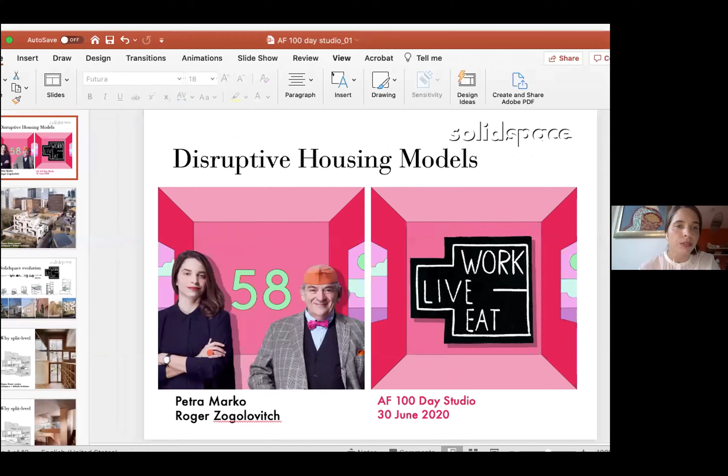Without further ado, I'm going to kick off our presentation, entitled Disruptive Housing Models. It's going to be a mix of our thinking about our own housing typology that we've been developing, but also a critique of the housing issues that we're facing as a city and the UK.

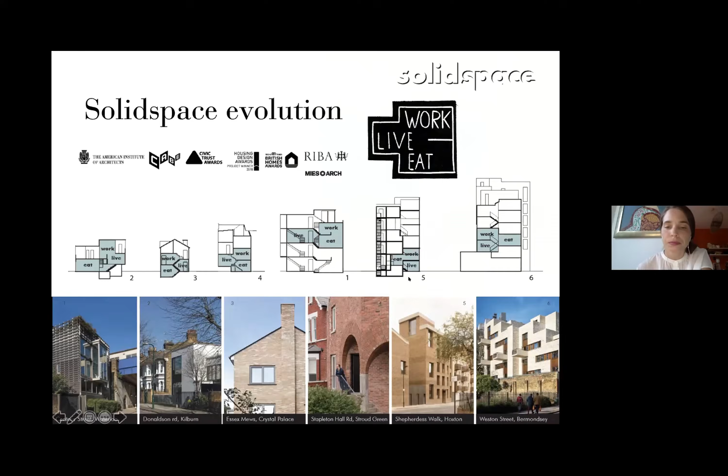So why are we so obsessed with this idea of the split level? There's lots of research that shows that daylight and outlook and our view of the sky enhances our well-being. And we have seen, particularly during the lockdown, that mental health is an issue for people whose housing is not adequate and doesn't provide those really important elements.

At the same time, by having this series of half levels, you're constantly prodded to move around, so it contributes to your day-to-day fitness. And at the same time, there's this fluidity between the spaces and a flexibility in the occupation.

Interestingly, the workspace has always been part of our Eat, Live, Work section for the last 15 years. It's never been as important as over the last 3 months, for so many of us working from home, to have this space where we can think and concentrate. On the right hand side you can see that gallery space used as a workspace, but it could easily be used as a play space for children, or as a large dining space. So it's really flexible to adapt.

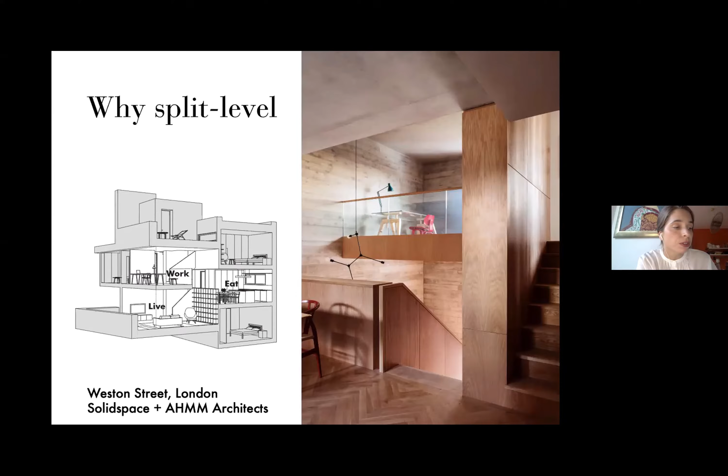Deborah Saunt described this quite lovely in her article about Shepherdess Walk, one of our projects: there is a kinetic sense of space between these semi-public rooms. The flats promote an extraordinary sensation of interconnectivity that is fraught with potential, allowing glimpses down to a living space or up to a galleried workspace. So this entire idea is about connection between people, and we can see how we suffer if we are removed from that connection, and our circle becomes smaller and smaller.

The idea of being connected to other human beings is the most natural thing that we have as a species, and it's not a new idea at all. In Parker Morris's book Homes for Today and Tomorrow, we found these lovely sketches by Gordon Cullen, which show exactly the same ideas about degrees of separation in these dotted boxes, but at the same time the fluidity of the space and the interconnection between them and the different activities you undertake.

So we've been having lots of thoughts, not just about construction and housing, but also about brand and why we need a housing brand, and trust between developers and the public. Roger has written plenty about this in his book, Shouldn't We All Be Developers?, which is really a kind of provocation and a think piece to talk about unlocking small sites and a radical change in which we can deliver more housing to more people, and good quality housing as such.

So at Solidspace we also have our manifesto, Making a Difference, which is challenging the status quo, thinking about what is the trust between the customer and the house builder or developer, and why this trust has been broken. If we look at the typical housing stock in London and other British cities, it is the Georgian and Victorian house which are the most loved and most trusted housing brands, and it hasn't been matched by any sort of new builds so far.

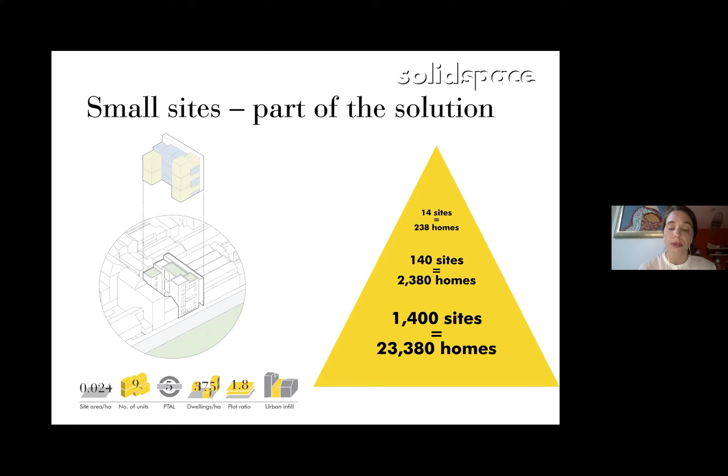But it is still to be seen how local authorities can proactively engage and release these sites. So we've also been working with other consultants on small sites for local authorities, to give advice on design codes.

And we've not been alone in this field. There's some wonderful examples also by local authority-led housing, such as the elderly housing by Peter Barber Architects in Barking and Dagenham, or community-led housing in Bermondsey by Bell Phillips Architects and Igloo.

So small sites come in all shapes and sizes, and here's one which we discovered in 2015 in North London, in a more leafy area of North London at the end of a Victorian terrace.

And you can see the transformation we've achieved with Stephen Taylor Architects, which has been really picking up on the local vernacular, very sensitive to the site. The site is locked between a road junction and a railway viaduct, so really challenging site.

We've developed 2 homes on this site, and the split level typology has resulted in this case in a specific way of entering the buildings, which has created this public threshold. So there's 2 entrances to each house, and one is half level up.

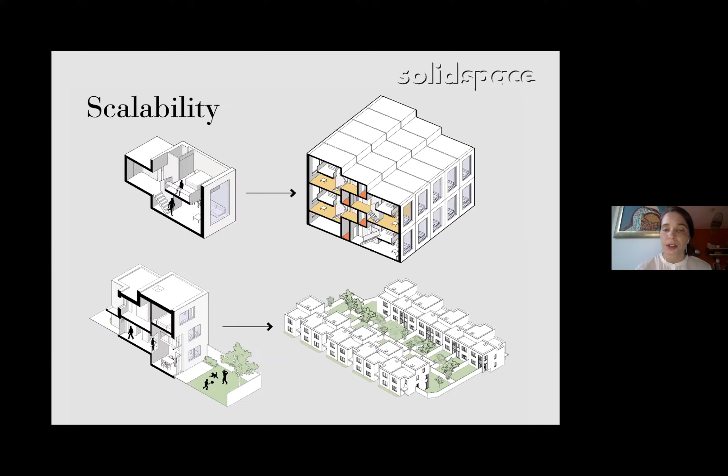So we're kind of taking forward the Weston Street model, which has been a refining of the 15-year Solidspace evolution, and applying it in a repeatable fashion.

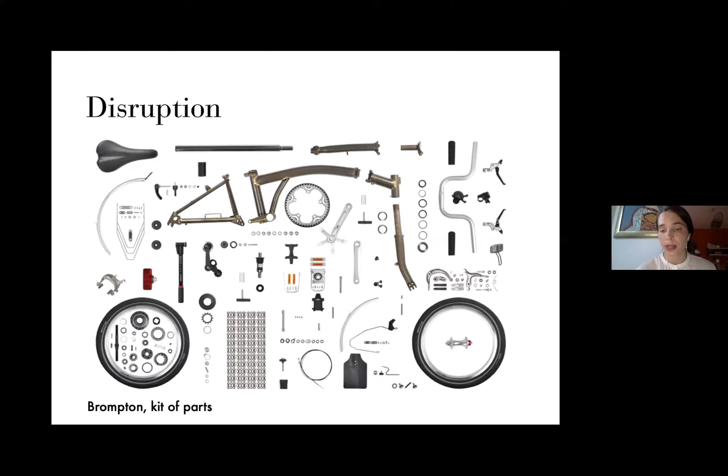Similarly, in the way that in other industries, successful, good quality products have been developed and took advantage of digital technologies. If you look at the example of Brompton, it is only the frame which the bicycle manufacturer has actually designed and manufactured. All the other elements, as a kit of parts, are from various suppliers.

So this is what we're really focusing on, because with our split level typology, it is the frame which is the core of our units, and we've been working and refining that frame and how it is made in order to get to construction costs that are not prohibitive for us to be able to really deliver Solidspace on many, many other sites.

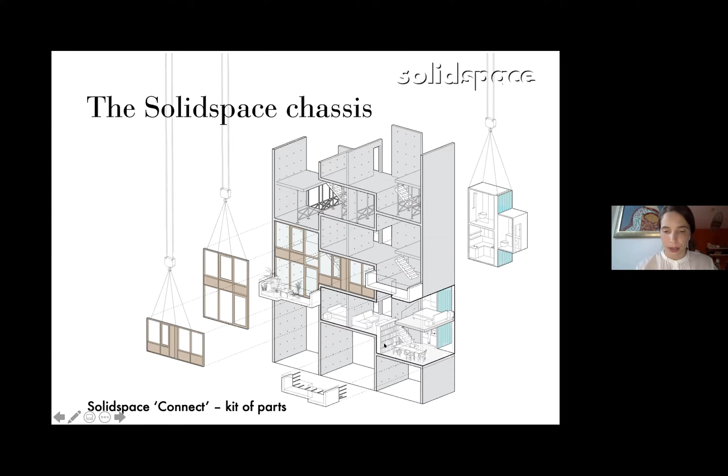So Roger will now take you forward in more detail about the construction and manufacturing process. And while he's getting ready with his slides, I'm going to read you a quick inspiration, and first go off my screen.

Thank you, Rosie. Just going to read a quick inspiration for any architects in the audience who've had different thoughts during lockdown, thinking about practicing differently, from Roger's book, Shouldn't We All Be Developers? Architects should consider forging new paths towards making their own buildings. The gap site is intriguing and within reach. These sites benefit from architecture to unlock their value. Architecture is about generating value, not cutting cost. So the value argument has really been at the core of what we are doing. We're not trying to cut costs, we're trying to take forward the value that we create with the spatial model.

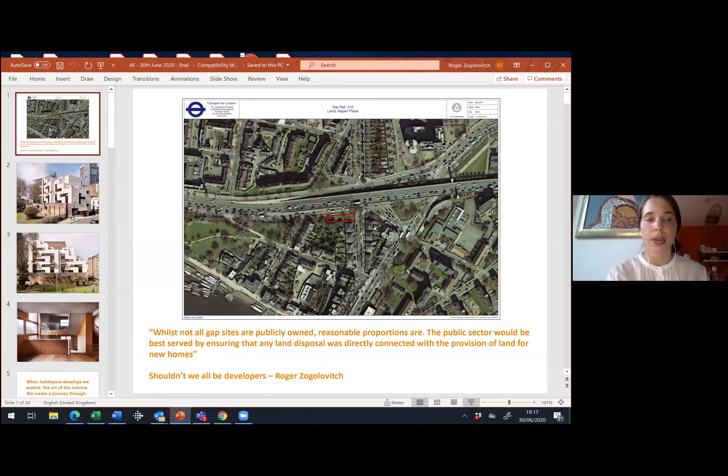And over to Roger now. Well, thank you, Petra, and good evening, everybody. It's a great pleasure to be here, although I find this kind of talking in a virtual thing a bit difficult, because I love to sense the audience when I talk, but I'm enjoying it, whatever it is. It's very lovely to communicate.

And I'm going to start really, Petra's explained to you that we are looking at gap sites, and just to give you an idea of the way in which TfL, which is a public sector owner, owns an enormous area of redundant sites that they're not using in central London that they've owned historically.

It's quite interesting. This one was one that they brought to the market in Aspen Place. It was secured by compulsory purchase at the time when they constructed Hammersmith Flyover. So here's a site that has actually been in public ownership since that flyover was constructed. They offered it as a sort of placatory thing to small developers.

We prepared a scheme, and then of course 5 minutes later they decided they wouldn't sell it after all.

As I said in my book, the issue about gap sites is that there is a responsibility, a wider responsibility in the public sector, to look carefully at the resource they own, the land, and to husband that land in a way that actually generates the numbers of houses we need.

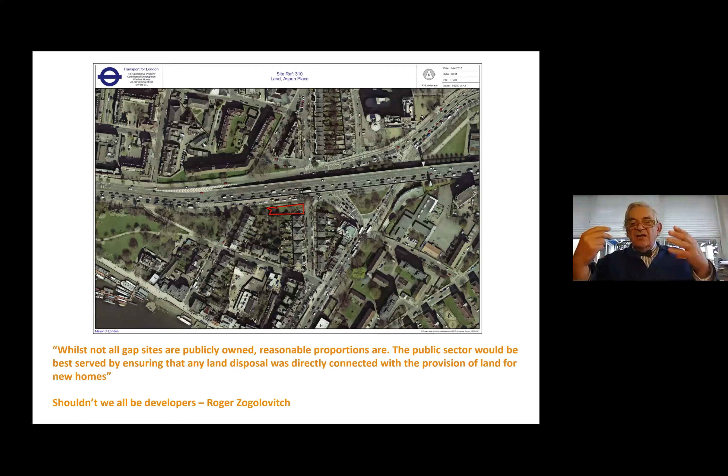Petra's very eloquent description, when she showed the document we produced and the escalation, is that somehow we have to get into the mentality of local authorities and government that house builders building at big scale are not the only way to do this. The way a city is made, the fine grain, the open grain, the quality of those spaces, the imagination that can come through anything, makes it much richer. It's just a matter of us continuing to make more of it.

I'm also going to show Weston Street. One of the things about Weston Street, which I adore and was very fundamental, follows on from the fundamental notion of Solidspace: that it is a gap site developer.

What that means is our developments sit inside a red line, a red line of ownership. When we acquired this site and talked to AHMM about its development, I was absolutely insistent that this wall running along the edge of the site was not going to be demolished. I could have made this into an overlooking of the park, as most normal developers would have done, but for me I felt it was essential.

This is an 18th century wall, parts of it 17th century. It represents the elements, it's like scar tissue, an archaeology representing what came before.

Simon's very elegant projection of the building above the wall. Obviously we filled in the base, and there's an office in the base, which is also very elegant. This all adds the idea that it gives the development a sense of place.

What you see in this elevation is us starting to establish the notion of the brand being able to describe itself. Anyone living in their houses can describe that there's something interesting going on. What is going on in terms of these shapes?

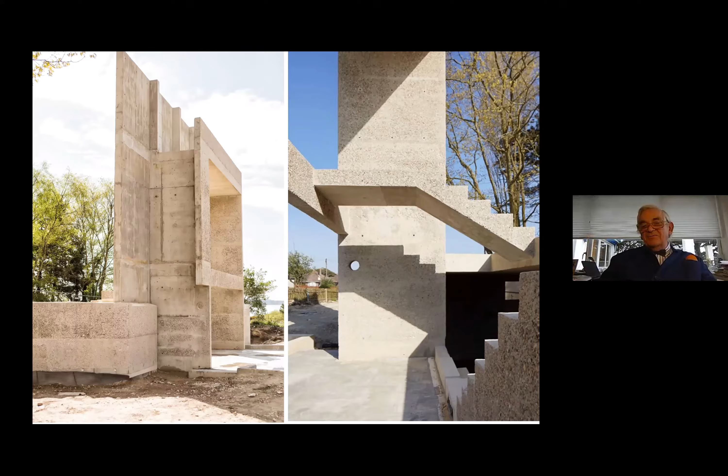Now I've moved on to another project we made here in Poole, and this project is an exercise in materiality, an exercise in making. I tried to insist, and I did, that everybody who made this project was local within the district. So I got stone from Portland, and the cement was obviously local.

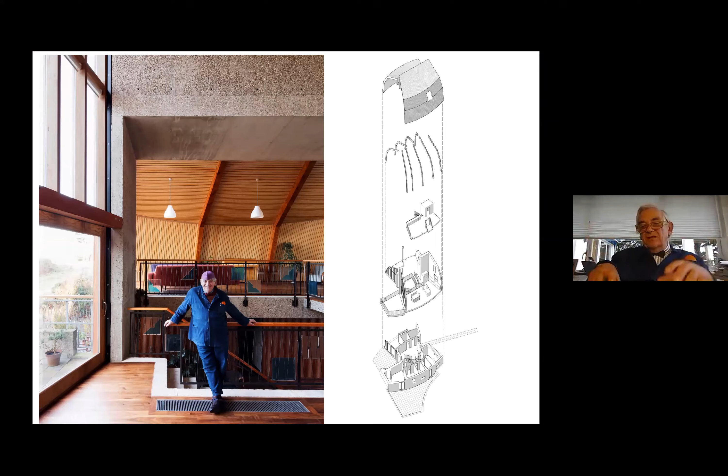This gives you a full picture - I built this framework that sits in the center of the house, and it stood there in what is a suburban plot, somewhat amusing my neighbors, and it was there longer than they thought. That's the reason, because ultimately, I did this with Meredith Bowles of Mole Architects, and if you look at the exploded axonometric on the right, you'll see the solid bits.

Then all of these elements, when you look inside the interior, like the prefabricated or handmade Douglas fir portals supported on the two elements, the metalwork made locally, the windows made locally - everything is, in a way, more bespoke than prefabricated and bespoke, but it's a recognition that there are elements we can pull together and make work in our buildings.

I often work - I'm a printmaker. I find there's a joy in going to my workshop down here where I can make some prints, and it's an amazing freedom that I don't have a planning committee or consultation. I just sit there between my press and myself, making what I need to do.

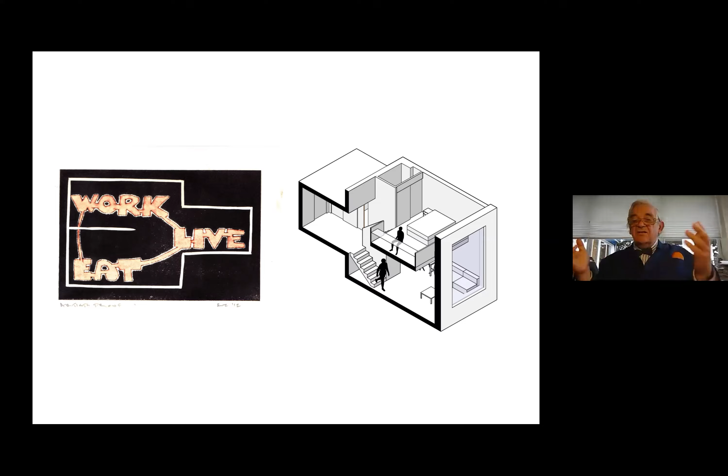But you can see that on the outside you have a very big window - nearly 4 meters high. So wherever you are, you're going to get this amazing sense of space. You can see there's a void. All our voids, by empirical study and research, are 1.5 meters wide.

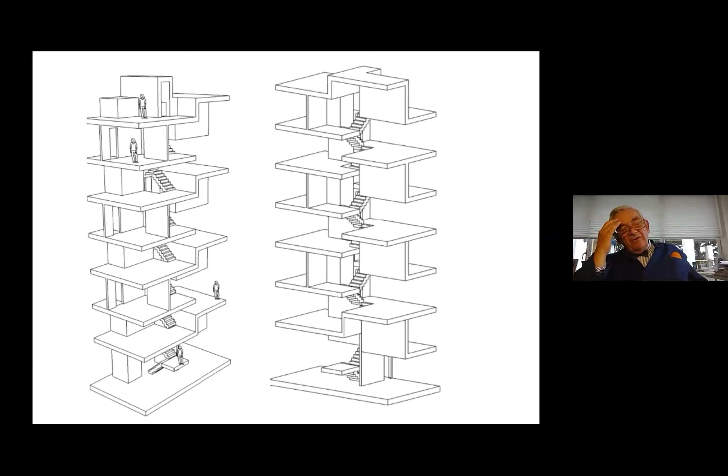Having played around with this volumetric exercise, we've suffered by the fact that we are very unusual almost in a global sense - and you in the architectural profession would find the same thing - that there are not many examples of buildings that are not made up of horizontal planes.

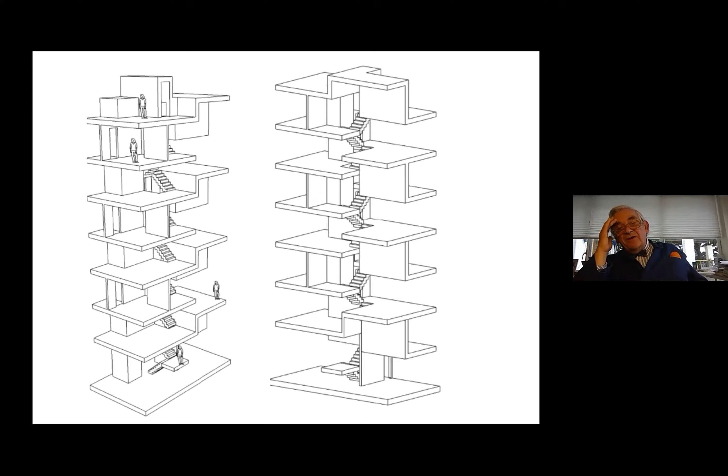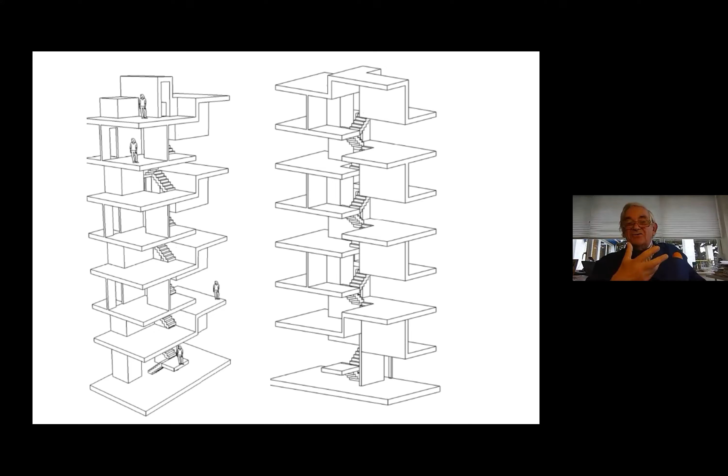So we've had to look at this from every angle to neutralize the impact, because as we all know, contractors do a lot of sucking of teeth. They look at that section and think, yes, I can charge twice for that section. And we, as a manufacturer, say no, we don't want you to charge twice - we want to rationalize it to the point that it becomes a simple logistic.

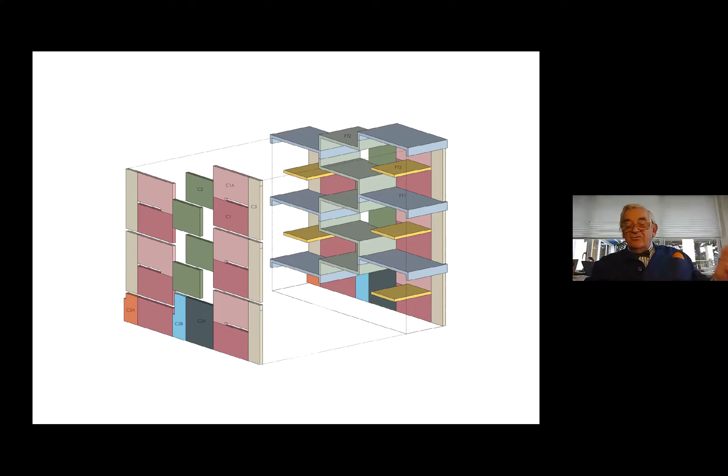I think we've done this in many ways, and this is an experimentation, again looking at the same East Down Park. Here we were proposing some prefabricated concrete panels assembled or held together between precast walls, so a whole precast assembly. You can see what we're trying to do is rationalize and find a way around the construction difficulty of dealing with these split levels of 1.4 and 2.8.

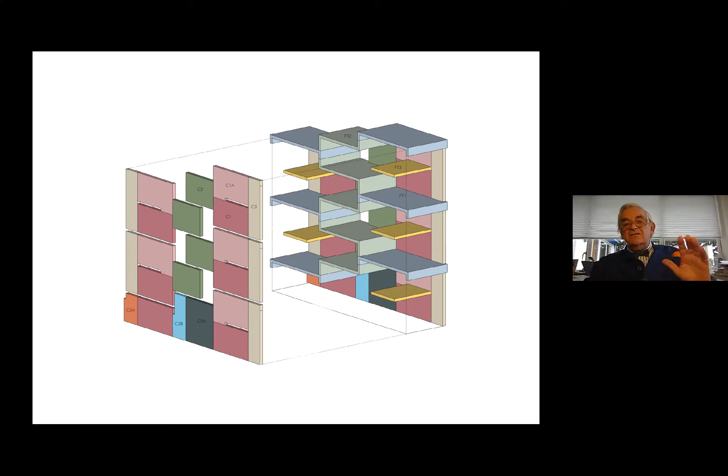And I think what we're saying is that we want this to become a building system. We want this to be able to be constructed.

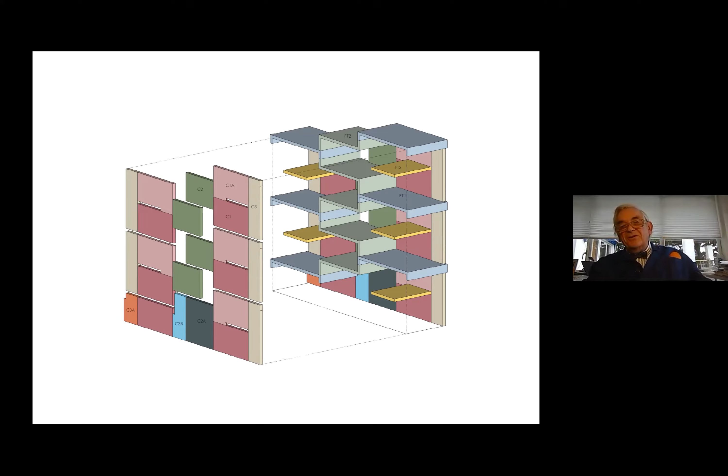We don't think enough effort is made in the industry in the process of manufacturing, so we want to get completely involved. We are our own developers, we own the company, and you can see that we don't do a lot of building. It's a slow process, but we have the beauty of having control over it.

I've also got the Brompton, and I think the reason I'm so fascinated by it is the reason why this is our attitude towards prefabrication. What this attitude towards prefabrication is saying is: what do we need to make that's special, and what do we need to find from a catalogue that actually fits into that place?

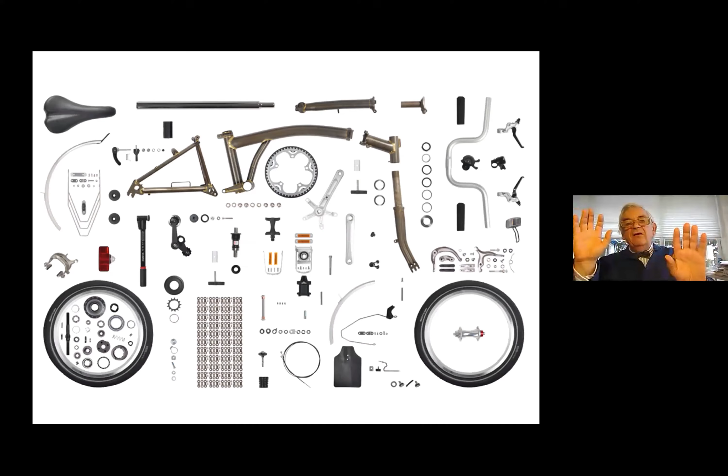I want to ask us all to think around the actual notion of the catalogue. Think of every catalogue - every time you look for bathroom or sanitary ware, you end up with a huge catalogue arriving on your desk, or a huge PDF with 500 or 700 different types of sanitary ware.

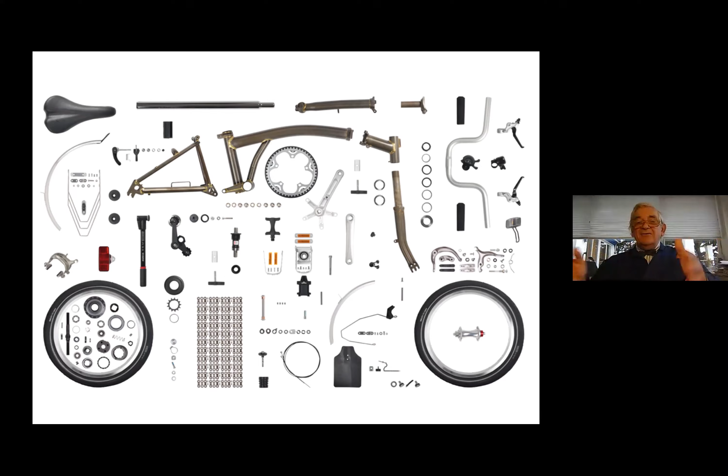You do the same when you come to a set of window designs, but nowhere do you find anything that demonstrates how that window meets the wall, how it actually joins to the wall. The window manufacturers stop at that point. What's so brilliant about what the Brompton has done is they've looked at the connection between those pieces.

So our attitude towards prefabrication, which is an absolute necessity in the industry, is to look at this as a series of small components that go together to make the whole.

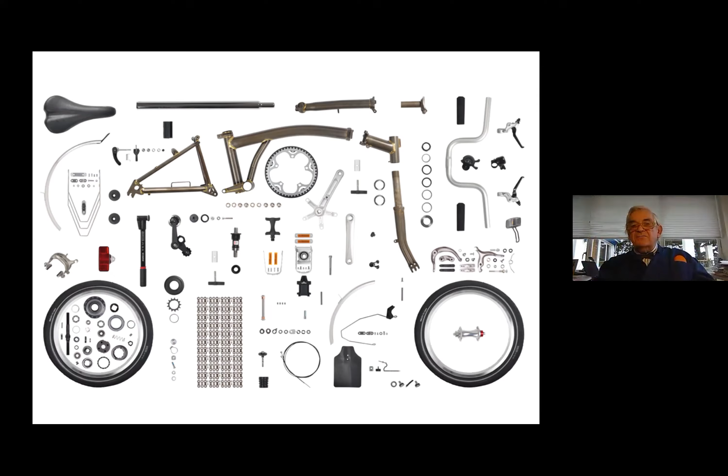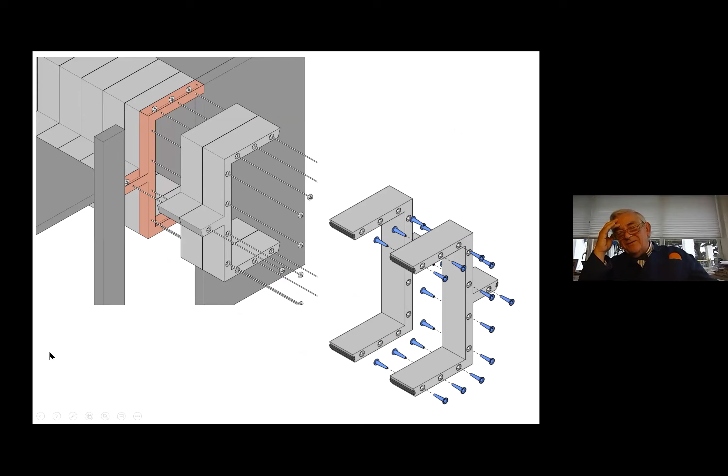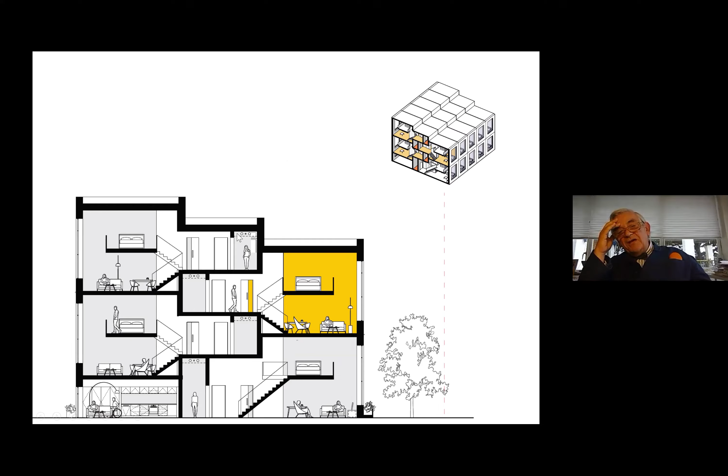And then when you arrive here, entering the apartment through the corridor there, you still have this view right the way through. So the whole thing gives you a kind of sense of space. Here's our volume, here's our staircases, and this is only 51 square meters, yet it's managed to create three live-work spaces.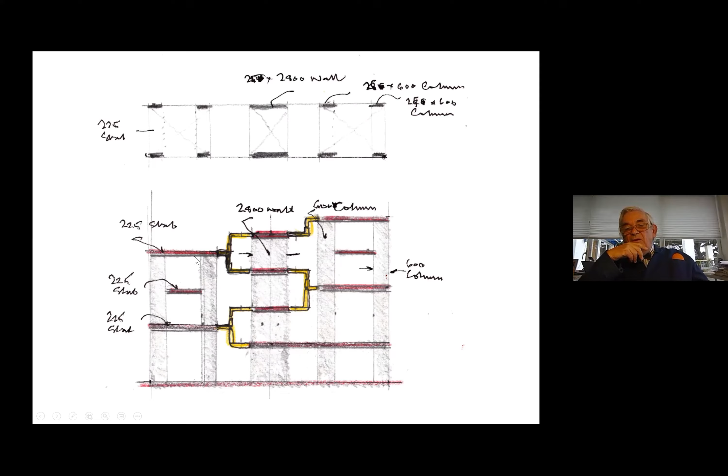If we defined our section as a separation between horizontal elements doing the split level, we were really effectively having what was a completely standard set of floor plates, flat floor plates. And then if we could find a way of inserting this shape, which connects in three points - one, two, three, in this case one, two, one, two, three.

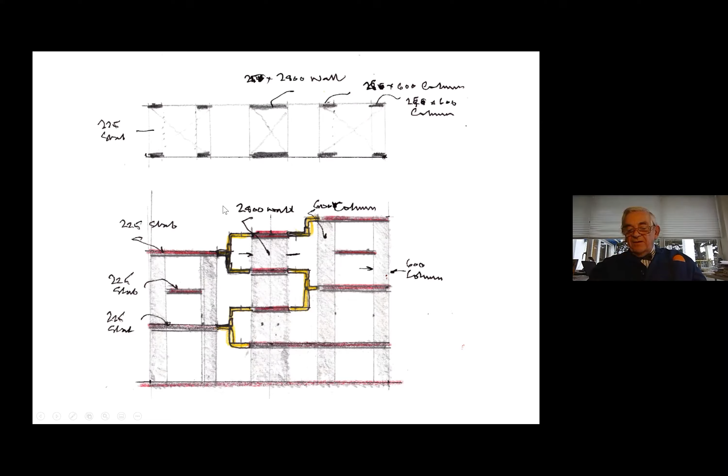And this is effectively the grid plan, showing the columns or the walls spanning, and then that's the gap that I then fill with this section. So we started to evolve - and this is some research work following on - looking at the way we can make concrete using fiber reinforcement, but at this stage we're going to have to use it traditionally.

What this is doing is ending up with a unit here which is either 400 or 600 wide. This is a unit which is a full 2.8 meters, so it picks up the 2.8 meters and the 1.4 meters.

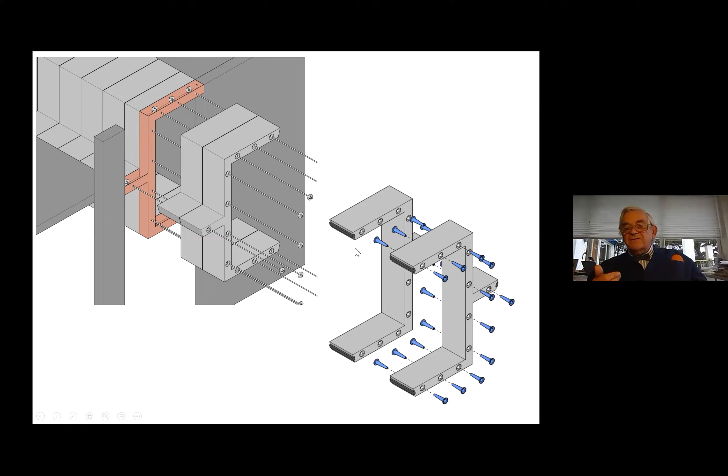Intriguingly, each one of these units, at 400 they weigh 1,000 kilograms, at 600 they weigh 1,500 kilograms. And then I'm using tie rods to act as post-tensioning - so what I'm using is connecting pieces with the floors that are coming in here, and tie rods.

So those tie rods are holding it, and this is the column grid. Here I'm lucky enough to find the bits - these are rods, which are the tie rods, which can take up the torque, and these are the connection pieces that connect the prefabricated unit to the in-situ unit. I've had these priced, but they're a bit expensive, so I'm going to have to keep looking. This is the level of detail that I like and enjoy getting to, to actually ensure that the project

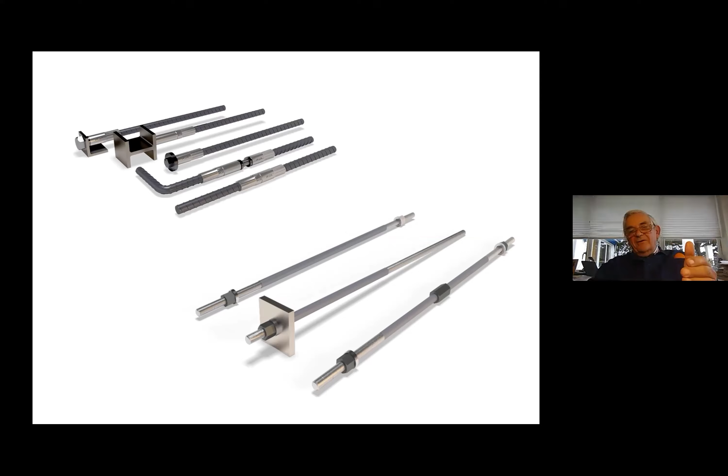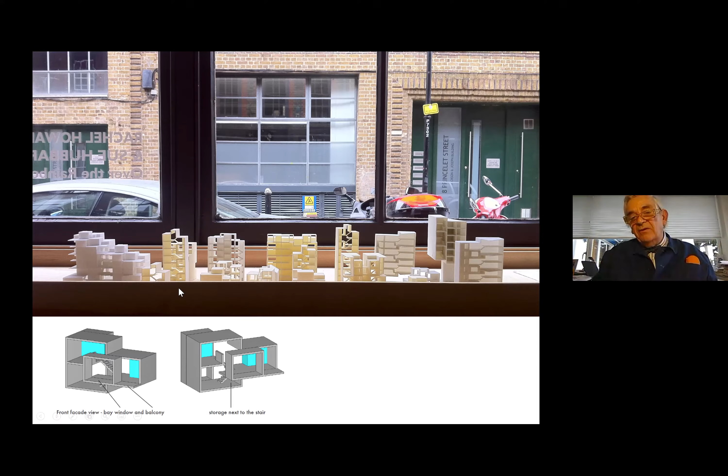ends up achieving what I want in terms of its completion. Coming back to the difficulty of working in this three-dimensional form, we're lucky enough to use a long period of time to utilize 3D models and 3D printing to make models to see each of these sitting on a site.

And then we can actually display them. I can always imagine one day when I have a wonderful building where all the light and air will be able to penetrate it at different levels. That allows me the freedom of doing some hand sketching to actually see some of the nature of the shape of the buildings that might emerge.

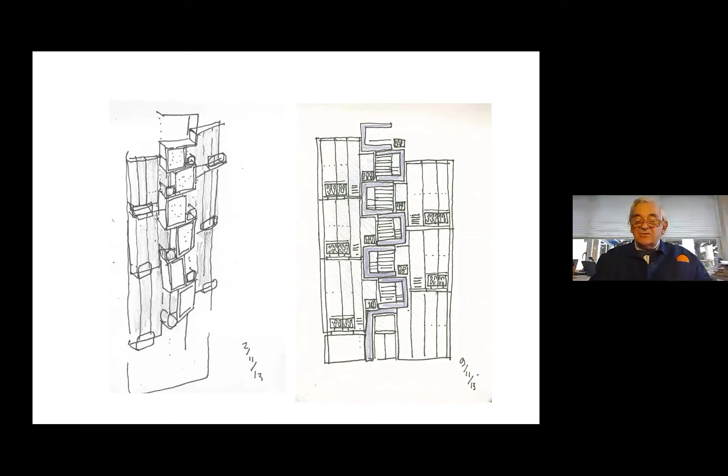When I mentioned the thing about how we are looking from the inside out, what that does is this system gives us freedom of the entire facade. So the facade can literally be whatever we want - it could be brick, or it could need to be glass, the facade is open, because it's literally filling in, since the structure provides all of the strength without the facade needing to do it.

So you're seeing this section, which is 2.8 and 1.4 - this is the half level that lies between these two other sections. That discipline has enabled us to really test this model to see how it works in lots of different places and situations. We haven't built a lot, because as a developer, you're always bidding for sites, and we're always in the market looking at sites. As a piece of research, it's given us an amazing opportunity to evolve our research around the reality of the sites, because they are real red lines.

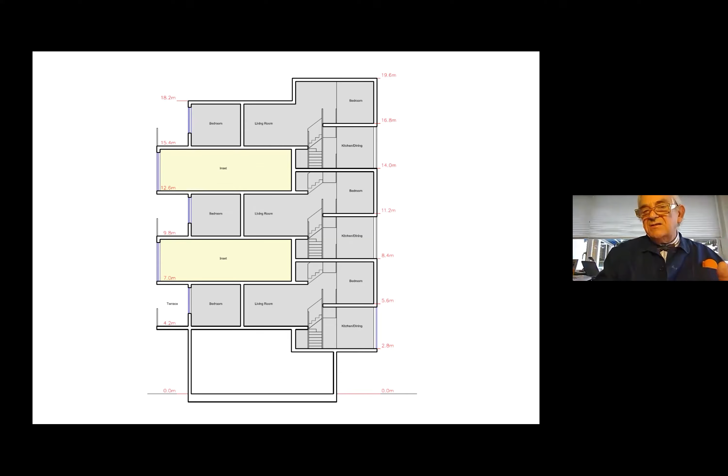They're not red lines that we own, but real red lines that somebody owns, and we've been able to bid - sometimes successfully, sometimes not. That's the land market. But from an architectural perspective, from testing the theory behind the split level and testing the density, it is a magnificent test, because it's based upon real sites.

I call this development as art, which is, to me as an architect and developer - and I'm both, I've been a developer now for over 30 years - the issue is that you can and should make development into an extraordinarily creative opportunity. If you're able to control it - control the company, control what you're doing - you're in a way like a filmmaker, like a restaurateur, able to see all the parts of it. It's not for everybody, but it does give you that opportunity to control.

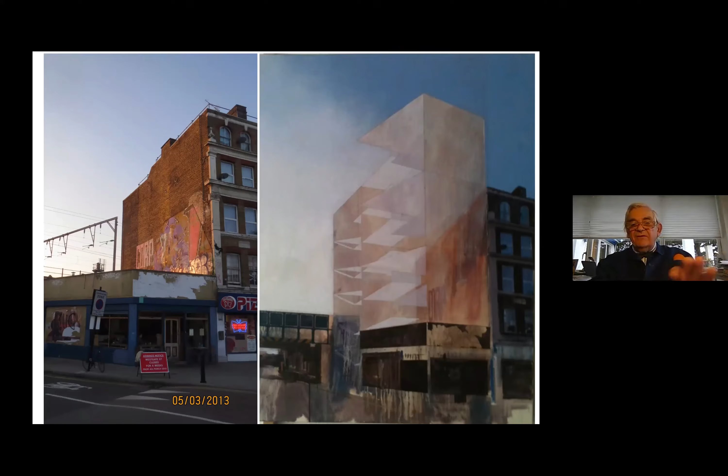There's been a fantastic privilege for us and the entire team over a long period of time to evolve what we're doing into something robust. What these slides are showing is some of the different mediums we use. When we come across a site like the one on the left-hand side, which has a small shop, a gap, a high wall, we work with an artist as part of our way of evolving it. The beauty of what the artist - Peter Wiley - does is he's represented that sense of the city with a reality which is really helpful.

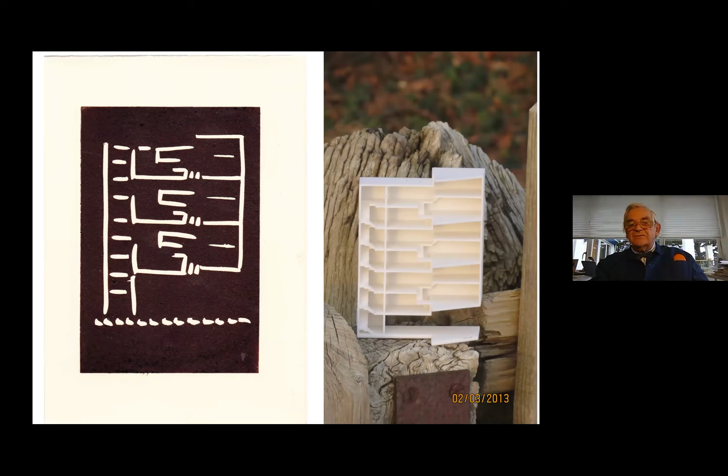Sometimes we use different techniques. On the left-hand side is a lino cut, really looking at how the section evolved. On the right-hand side is another one of our 3D printed models. I think this is another part of my theory of the development of the city.

This comes right back to the first slide I showed you, where we're looking at that kind of retained wall. And my belief is that we are only part of the history of the remaking of the city. In that process of remaking the city, we should have belief in somehow evolving, and I think this is a much more sustainable approach, evolving our new buildings out of the existing stock. This is just making a suggestion that we can rise above the existing townscape, providing additional accommodation without upsetting the memory of the townscape that lies below.

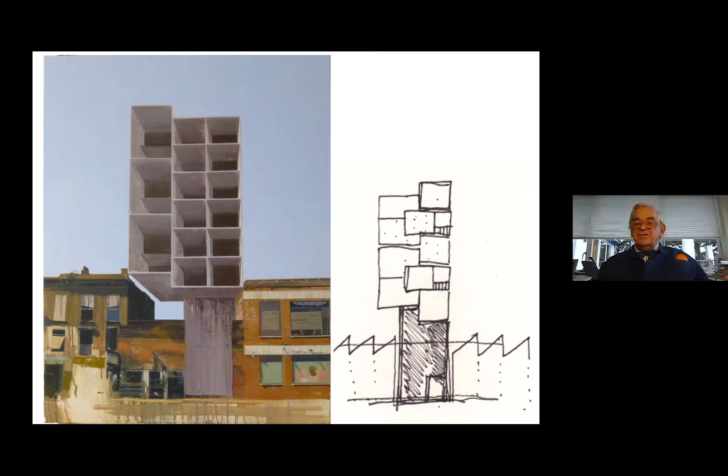So Peter Wiley again did this image on the left-hand side. What that image shows is so evocative - it's actually Mare Street, recognizable Mare Street, and it's somehow evocative of the fact that a new building there could sit above that, occupying the airspace. I'd like to finish this talk with a print I made recently.

I think in these very odd or weird times, it's very easy for us to lose our way. We are facing a future that we can't kind of identify. But I think it's a challenge that as architects, as architects who imagine with imagination, it's a challenge that a city like London - which has suffered so badly from COVID-19, in terms of the amount of deaths because of the density, and the nervousness of how people are going to repopulate the city - it does give us an opportunity for some fresh thinking, from imagination that we as architects can bring.

And I feel therefore we don't need to worry about the future. We just need to go on imagining it. Thank you very much.

Thank you, Roger. Thank you both. Roger, maybe if you unshare your screen. So guys, do pitch questions in the chat box, or just put your name in the chat box and I'll come to you. I can see there's a good one already there. But maybe if I can just kick off.